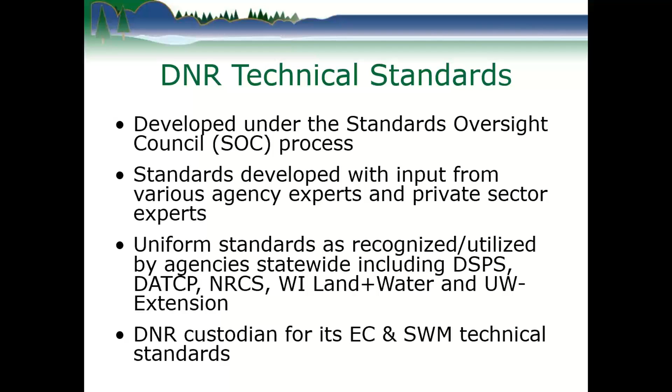As Kate mentioned, as far as the SOC Council, this is a process that many state agencies are using to have a uniform process to develop statewide standards. We pulled together a team, it was close to a year ago when we started on this particular standard. Being how this is a DNR standard, DNR is considered the custodian for it. We are for any of the erosion control or stormwater management technical standards, but there is a number of other agencies that use this: DATCP, NRCS, Wisconsin Land+Water, and UW Extension.

As far as the team that we had, typically there are somewhere in the range of maybe 8 to a dozen people that are on a SOC team. Kate was the coordinator, I was the team lead. Along with that, we basically solicit statewide for applicants that want to be on this type of team. And from here, we try to pick a diverse group of experts that are knowledgeable on the standard that we're looking to develop. So on this, we have a few representatives from manufacturers or those selling these devices, along with private consultants that have used or are looking to use these devices into the future. As well, we even have some representation of those that have worked on models to model these devices.

Proprietary filtration device - you'll see the acronym PFD in this presentation a number of times. So what is a PFD? Generally, it's a granular media filter, it could be a membrane, by which water passes through to remove pollutants.

Now, this standard was developed to basically come up with how to size or determine what efficiency is given for an actual PFD device. And when I say device, I'm not just saying the media that's used. It's actually, we're looking at the results of the chamber, the filter cartridges. These devices also commonly include bypasses, settling chambers, and other mechanisms. So when we're analyzing and looking at the efficiency of this, it's really the device as a whole that is considered in getting this treatment efficiency. Although you need to size it and decide how many cartridges you need to have in there, it's really the device as a whole.

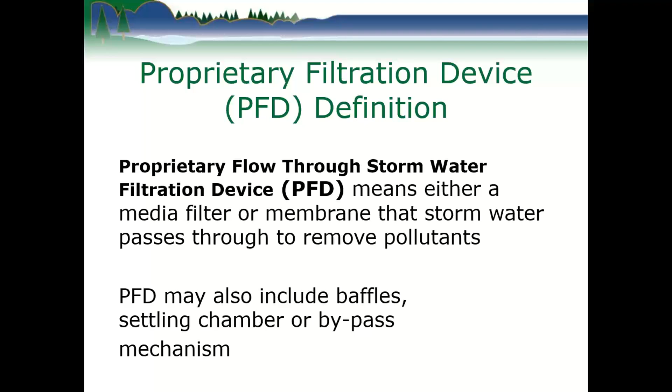What is the purpose of this device? It is used to reduce pollutants discharged to waters of the state, or it might be used for pre-treatment, such as for infiltration below ground.

What this standard is designed for is coming up with the total suspended solids and total phosphorus removal rate that someone can take credit for with this device in Wisconsin.

As far as these devices, they can also remove metals and other pollutants. This standard did not focus on those other pollutants at this time. That is something we may focus on in the future, but largely TSS and total phosphorus, especially with TMDLs, are really the two main pollutants in Wisconsin that we target with these stormwater treatment devices.

Again, this device we're looking at is really the device as a whole, not just the media. There are proprietary medias out there, but this standard is not meant to address that. It's really meant to address the whole system that someone was getting to put in.

As far as the standard, DNR does not give device or product approvals, per se. What we have developed here is a standard by which, if the device meets the standard, you can use it. As far as sizing the device and maintenance of it, that should be consistent with the standard's criteria.

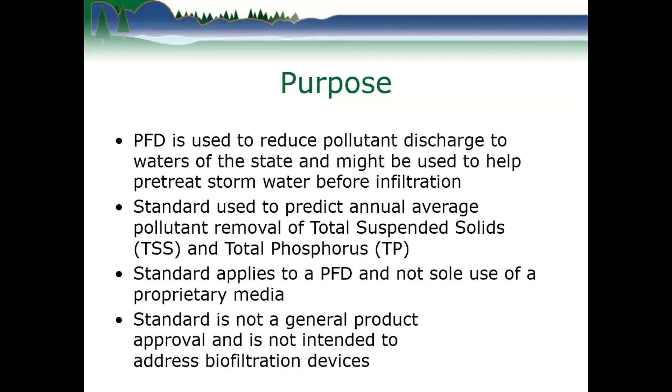Now, conditions where the practices apply. As I said, these are really meant for stormwater runoff. In Wisconsin, we look at the annual average mass reduction of these devices. With storm events, larger storm events may not have as high a treatment occurring.

Smaller storm events, you get a higher level of treatment. As you probably know, new development is usually striving for an 80% overall TSS reduction, where redevelopment commonly is at the 40% level, but it is judged on an annual average mass basis. This standard is meant to address that, not to give you an end-of-pipe effluent concentration like a wastewater permit would include.

Now, as far as using this standard, I mentioned new development is 80%. What we're expecting these filter devices as a credit to get for total suspended solids is something that's going to range from 50 to 80% control.

So trying to get that 80% new development standard, generally these devices are not expected to be used for new development as a sole device anyway. It's more likely they're going to be used for a redevelopment site where your standard is like 40% or something lower. That way, even though the device may be getting more than 40%, it allows for more bypass or uncontrolled areas, so overall you can still meet that 40% standard for a redevelopment site.

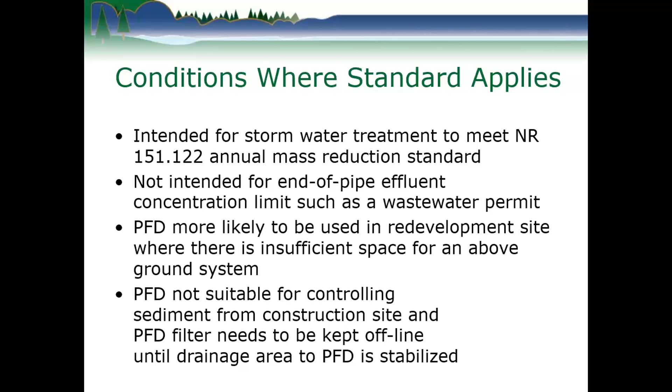Also somewhat similar to infiltration—now, I'm not calling them an infiltration device, but they are a filter. Infiltration devices filter through native soil. One thing to be aware of is when you're putting devices below ground, you're potentially getting down into groundwater areas.

These devices, at least the granular filter media, generally have dry-out periods between rainfall events. Our standard says you have to have at least that granular media part of the device 1 foot above seasonal high groundwater.

You also need to account for whether there's backwater that could potentially come up into the system. It should be protected from events up to a 10-year, 24-hour event if it's being affected by downstream streams or the like that could back up into there.

Putting this underground where you have high groundwater is something that may not work. Maybe there's an alternative that could be worked in there, like putting an under-drain system around below this device to keep groundwater from getting up into it. That might be one way to address the seasonal high groundwater issue.

But again, it's important, just like an infiltration device, that its media needs to have dry-out periods between rainfall events to aerate. Otherwise, that media is likely to become compromised and won't flow through as well if it doesn't get regular dry-out periods.

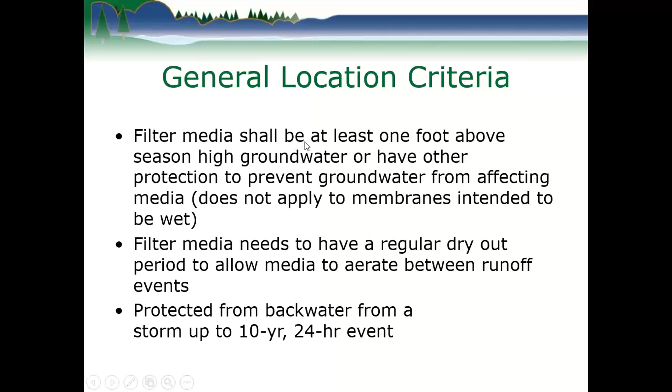One of the biggest things to know for people designing and using these systems is there are two different design criteria you need to meet. One is maintenance life. These filters, just like anything in life, a car filter or the like, if they're doing their job, they're catching pollutants and starting to fill up. Our design maintenance criterion is that those filters should be expected to last 12 months before becoming spent.

When I say spent, that's a 10% drop in flow rate from its maximum treatment flow rate, MTFR. How do you tell a 10% drop in flow rate? That's something I'll get to a little later. We're actually using a New Jersey standard for making that determination.

The other thing that needs to be checked is the filter flow capacity. As I said, there are systems that may have bypasses. You need to look at how much water needs to go through that filter to meet the standards, which dictates how many filter cartridges or what capacity you need. You need to check both of these and use whichever indicates the higher number of filter cartridges necessary.

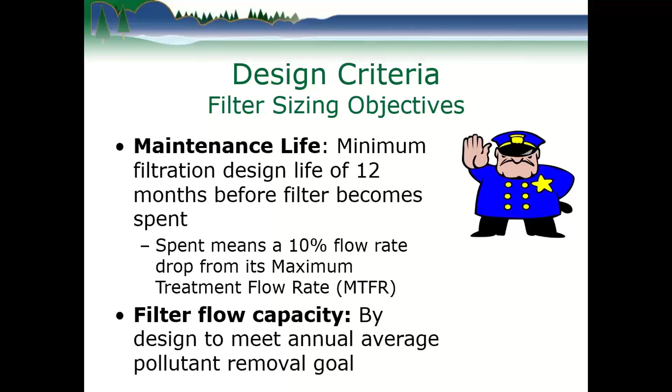Now, design life before maintenance. The standard we're using is a New Jersey Department of Environmental Protection certification of how much drainage area a filter cartridge can handle. It's a matter of at what point the filter cartridge is considered spent. New Jersey's test is such that when the maximum treatment flow rate drops by 10% in testing, it's then considered spent, and at that point it should be changed.

Now, they're testing to get to that point. What they've determined is they're looking at 600 pounds per acre per year coming off a surface like a parking lot for a 12-month period. Some people have said, hey, that's New Jersey, is that the same in Wisconsin? Actually, that is comparable to the load that comes off a Wisconsin parking lot as well, so they were looking at the same type of load from a parking lot that's equivalent here in Wisconsin.

I'll be straight up on one thing: New Jersey's test was done on a synthetic particle size distribution that isn't as fine as, let's say, the NURP particle size distribution, which is what we base our standards on here in Wisconsin. So it's a little coarser, but this is actually the only testing where they've done this to determine when these cartridges clog up. One could argue it's not rigorous enough, but the reality is this is the only test right now that's available.

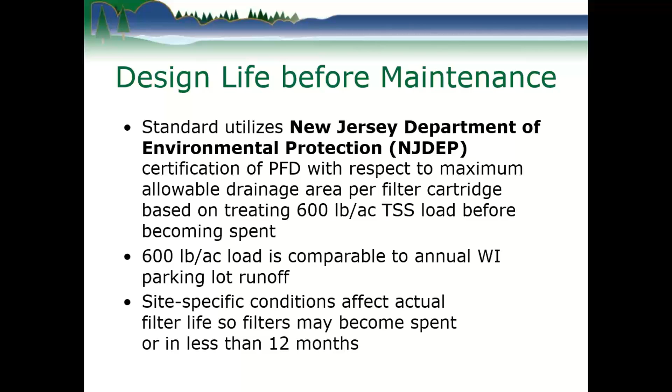Okay, and again, this is by design. Now, in real life, there could be more or less, or an unusual event that happens. So this doesn't guarantee that if there's some type of significant load of some kind coming in there, it could compromise and reduce the life of that filter. I'll touch upon that later with our inspections.

Okay, so actually determining how many filters is needed based on maintenance is actually a very simple calculation. You'll find that our calculation for flow is much more involved. Again, we're looking at the New Jersey kind of certified approval. They actually have gone through each of the cartridges and sizes and come up with how much drainage area each cartridge can handle for 12 months before being considered spent.

So here's an example. Our site is 1.1 acres draining to that proprietary filter device system. Assume that the filter cartridge has been approved by NJDEP for 0.06 acres. So if you're going to filter 1.1 acres with a device able to handle 0.06, the calculation is straightforward: 1.1 divided by 0.06 gives you 18.3. You always round up. So for maintenance, you would need at least 19 filters for this site so that it can meet the 12-month period without becoming spent by design.

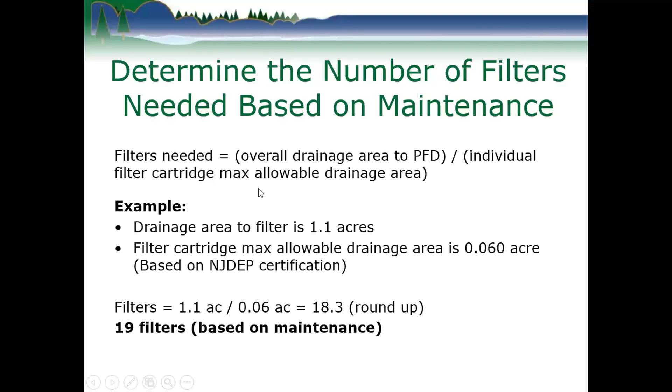Moving forward, the next calculation that has to be done is for filter flow capacity.

These cartridges have a given MTFR, a maximum treatment flow rate. They have limiters to keep from having more flow going through the filter than this. That is what they've been tested and proved for. If you're trying to push more water through than what they were designed to handle, they likely will not have as good a treatment efficiency with more water going through them. So they are limited with flow restrictors or similar, so that they don't exceed this rate.

As far as what affects the maximum treatment flow rate and how many cartridges you need for flow, it's going to be based on the site pollutant removal that's needed. Are you dealing with a redevelopment standard of 40%? Do you need to hit a higher percent than that or not? Also, Wisconsin's annual rainfall, the rate at which it comes down, that distribution affects how many filters you need, and the PFD specific treatment performance.

Now, the PFD specific treatment performance - I haven't said it yet, but we are using Washington State's TAPE approved reports, and devices are what we are allowing to be used. Washington State, when they give an approval for a device, they have given approval that that device meets 80% TSS removal based on real stormwater runoff.

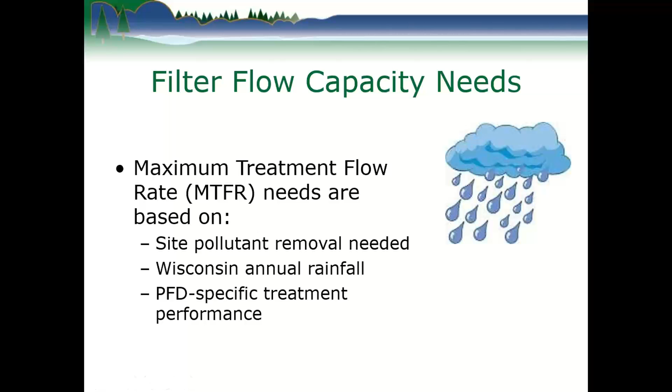You will see that we adjust the efficiency that Washington State's TAPE program has approved, adjusting it downward based on the NURP particle size distribution of the rainfall runoff event that was tested. Now, in determining the maximum flow rate needed, there are actually two different calculation processes for flow rates.

The first, option one, is the calculation process laid out in the standard, which I will be going through. The second option is use of an approved model. Models like WinSLAMM or P8 are generally approved models.

DNR has put together some conditions or restrictions through our guidance memos on how to adapt those models to Wisconsin. At this time, WinSLAMM has two proprietary filter devices in its model. I don't believe P8 has any at this time. We have looked at those two devices in WinSLAMM and how they're done.

We do approve that you can use WinSLAMM to model that. I am not going to go through how to use WinSLAMM here, but that is an alternative. Now, what we heard very loud and clear is that there are other filter devices on the market.

We are largely looking at those that have been approved through the Washington State TAPE program. I don't know the exact number, but I'd say there are at least a half dozen that have gotten that TAPE GULD approval for sediment. They call it a basic approval.

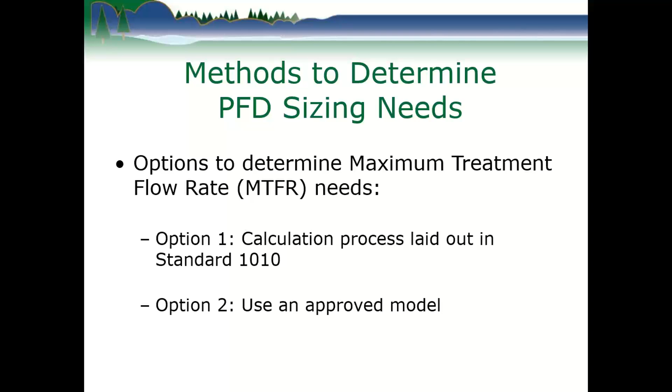Now, the standard 1010 does have some examples in there, and I think it does a pretty good job of laying out how to go through them. So if this presentation isn't clear and you have questions, I suggest going to that standard and looking through those examples before giving me a call.

Granted, if you work through things and still have questions or want to check with me, you're welcome to shoot me an email or give me a phone call and I'll try to help you with that. But I do think the standard goes through pretty well with the examples in there.

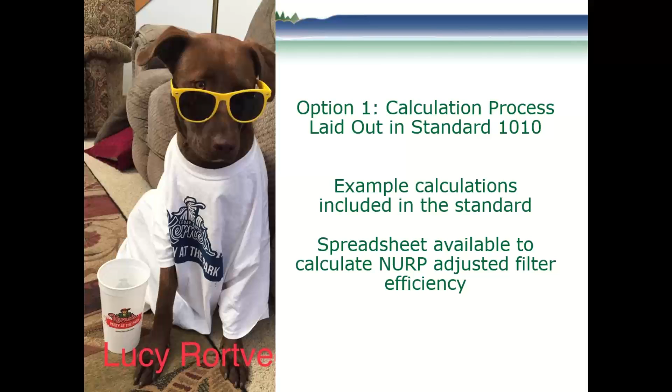The other thing, we've developed a spreadsheet calculation to help with the NURP adjusted filter efficiency. That is what I believe to be the most complex or potentially confusing step, but our spreadsheet, I think, makes that pretty clear to work through.

Okay, now coming up with site treatment: how much do we need to treat? It's actually a very simple looking equation. You're essentially looking at how much runoff is filtered times the efficiency of the filter, which gives you the amount of control, such as for TSS, for the site.

So if you're looking at a redevelopment site, generally the DNR statewide standard is 40% TSS control. I know there are individual municipalities that require more than that, especially to help meet their TMDL reductions expected of them throughout their municipality. But you need to know what standard you're striving for.

Really, the next step in the process is determining the overall NURP adjusted filter efficiency for the filters I'm looking at using. Based on that, you're able to calculate what percentage of the annual average runoff you need to filter to meet that standard. And the amount of annual average runoff is used to figure out how much filter capacity, how many filters, and how much maximum treatment flow rate you need to treat that water.

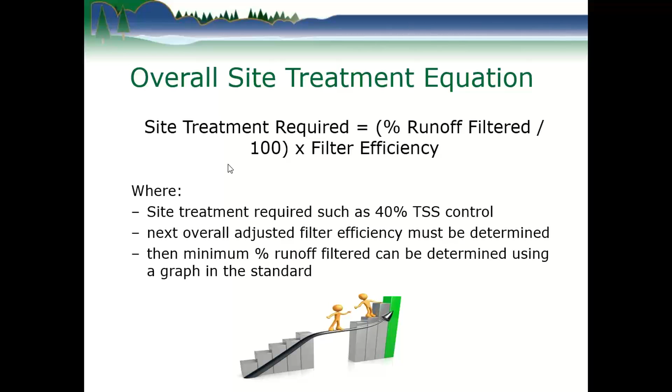Okay, as I mentioned, we are using the data from the test report from the Washington State TAPE certification. They've done testing of real stormwater. They generally have about, I believe, somewhere between 12 to 15 real stormwater runoff events that were analyzed.

They look at the particle size distribution from at least 3 influent samples, and then they analyze all of the effluent samples for those 12 to 15 events to determine the particle size breakdown. What we're doing is looking at how that particle size distribution compares to the NURP particle size distribution. If it's not as fine, they're going to have a reduction in the rate measured as part of that certified test.

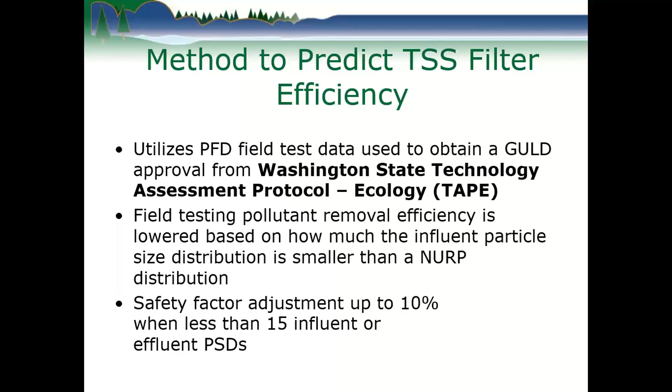The other thing we're pushing for is having at least 15 influent and effluent particle size distributions taken. A lot of the testing that has occurred only had 3 influent particle size distributions, so we're adding a safety factor, adjusting that rate down by up to 10% if there's less than 15 influent and effluent PSDs.

Okay, I know this is pretty small. Hopefully everybody is at least looking at a stationary computer or laptop with a big enough screen. When I say we're adjusting the NURP particle size distribution, if you look at the left column, particle size in microns, generally this TAPE testing has the particle size distribution broken into at least 3 groupings, and these are the most common: less than 4 microns, between 4 to 62.5, and greater than 62.5 microns.

Now the next column over, NURP PSD, percent by mass, is the percent by mass of particles in the NURP particle size distribution for that grouping. So 29% of the mass of basically TSS is smaller than 4 microns, 58% is in that middle category, and over 13% of the mass are particles over 62.5.

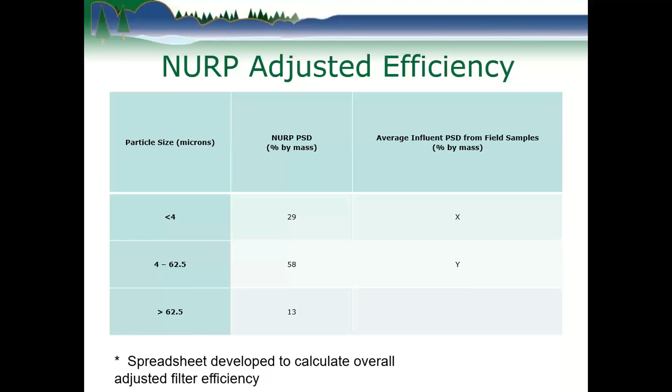Now in the far right column, X and Y, we will need to look at the report and determine what the average percent mass in those two categories is that was used in the Washington State TAPE testing. So we need a value for X and a value for Y. We've developed a spreadsheet calculation to help with this process, and this is where I'm going to switch over and hopefully show you a little better.

Eric, we do have one more question related to the TAPE listing.

The question reads: does Washington State TAPE or New Jersey DEP have a list of approved proprietary PFDs that we can select from? I did just paste the Washington list that we had researched and analyzed as part of the teamwork into the chat box, but do you have anything more to add as far as that starting list?

Yeah, my recommendation would be, as far as NJDEP with the maintenance, we're using that just for maintenance, but what we're using is devices that were approved for TAPE. So I would suggest looking at the Washington State TAPE approved devices.

They have a website where, as I said, they've got different kinds of approvals. The main approval that everyone is trying to shoot for is this GULD approval.

You'll also find that they have a PULD and a CULD, which means their initial stages of, hey, we did synthetic testing, it looks good, we're going to do real stormwater testing, and the next level is checking again. But the GULD is really the gold standard, where they have done their full analysis.

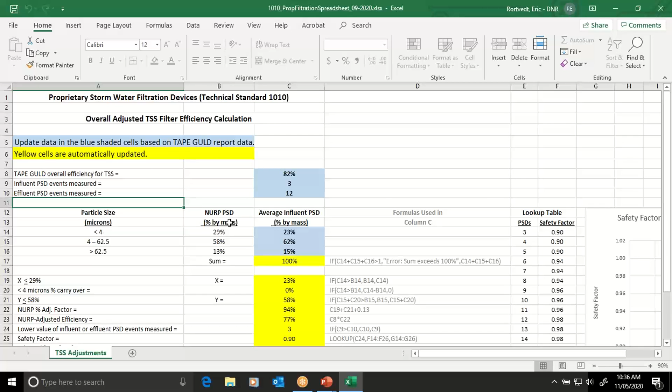Okay, I'm going to move on now. What I have up is a spreadsheet I put together to help with adjustment of the pollutant efficiency. The shaded areas - blue is where a person needs to input information, only 6 fields to fill in. The yellow is what's calculated automatically. Scrolling to the bottom, what you're ultimately looking for is the overall adjusted TSS filter efficiency, shown here as 69%.

So what you'll find when you go through using the TAPE approved reports and information, this overall efficiency is going to be at a minimum 80%. It could be higher than that. So you put the overall efficiency determined in the report in here.

This is the exact same spreadsheet that's on DNR's website. If you look under our DNR stormwater post-construction standards page, where we have technical standards like wet detention ponds, infiltration basins, bioretention, we also have this standard for proprietary filter standards 1010. You'll find 3 files there: the standard, the spreadsheet, and a technical note a few pages long discussing primarily what to expect and be aware of with maintenance of these systems.

These next 2 values are the number of PSDs measured for the influent, so you can change those. If you were to have 15 for both of these or more, the safety factor would be 1 - there would be no adjustment. But if either value is less than 15, there is somewhat of an adjustment, at a maximum of 10%.

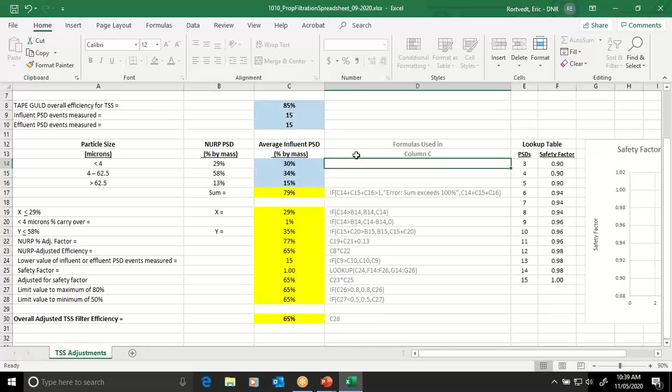I've gone step by step through here. If you wanted to take time to verify what's done, I've also shown where the formulas are, exactly how we step through this process. This spreadsheet is locked such that the only things you can change are the blue shaded cells where you need to input information. This is pretty good at walking you through and making sure you don't get off track.

As I said, I was the team lead with the standard, and I put together this spreadsheet. So if you have issues with it or find something that doesn't seem right, feel free to send me an email or give me a phone call, and I can try to help you there.

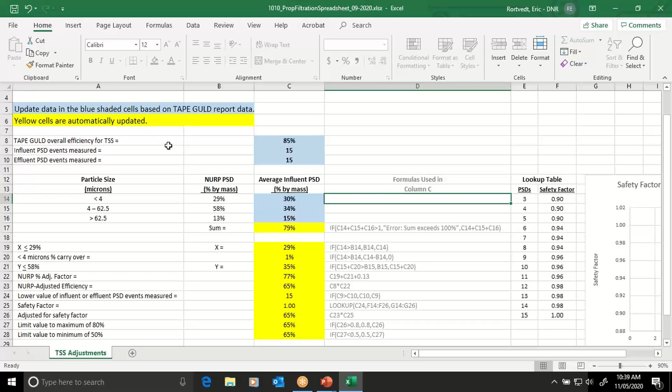Okay, well, I'm going to move off the spreadsheet now and go back to my presentation.

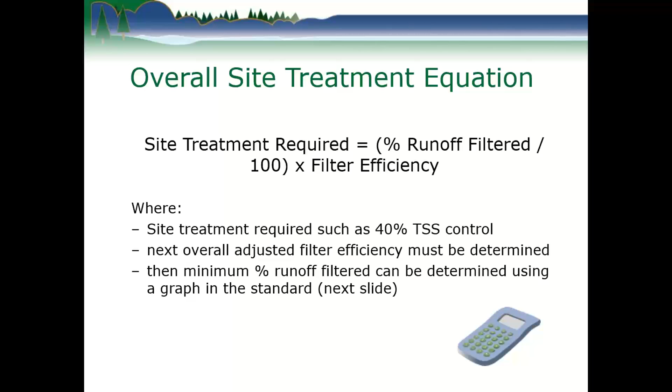Okay, now this is the same slide we went over before talking about the equation. I just want to touch back and say the main thing as far as what standard to meet, if it's redevelopment 40%, the next step is determining what the overall adjusted filter efficiency is. That's really what's generated out of the spreadsheet, the final value at the bottom of the state page, that's the overall adjusted filter efficiency. With those two variables, knowing what standard to meet and what the filter efficiency is, and the amount of water coming to the filter, we can determine how much annual average runoff is needed.

So for example, if we determine through our calculations that we need to meet that 40% TSS control standard, and we know that our proprietary filter is going to get 60% treatment, well, we need to get 40, our filter gets 60%. Based on that, we can actually allow for about 33% of the annual average runoff either bypassing or being untreated, not going through the filter.

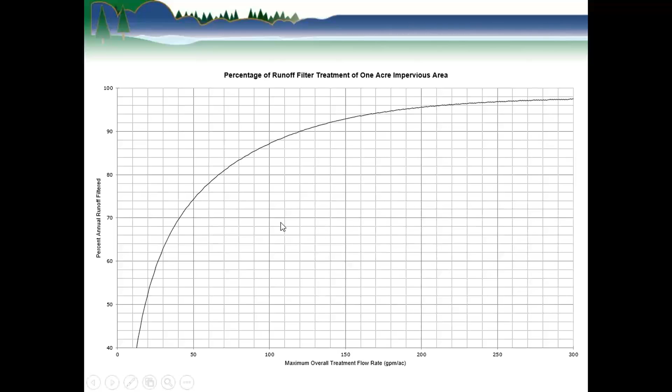So it's 40% times 100, you're dividing that by the efficiency of the filter times the percentage of the site that's treated. So you're looking at treating 1.1 acres out of 1.4 of the parking lot. When you go through that, the value is 85%. You need to treat 85% of the annual average runoff for this example. So 85%, jumping back here, 85% on here, moving across till we hit this line, move down to the x-axis, you're going to find that you need about 87 gallons per minute per acre of capacity. So now I'm going to go to the next slide.

Like I said, just from the last slide, we determined 85% of the annual runoff is needed. We looked at the graph and determined that it requires 87 gallons per minute of treatment flow rate per acre. But we actually have 1.1 acres of area draining to our filters, and that 87 gallons per minute is for 1 acre. So we need to upscale it a bit, doing 87 times 1.1 acres, which gives us 96 gallons per minute of treatment flow rate needed. And we always round up.

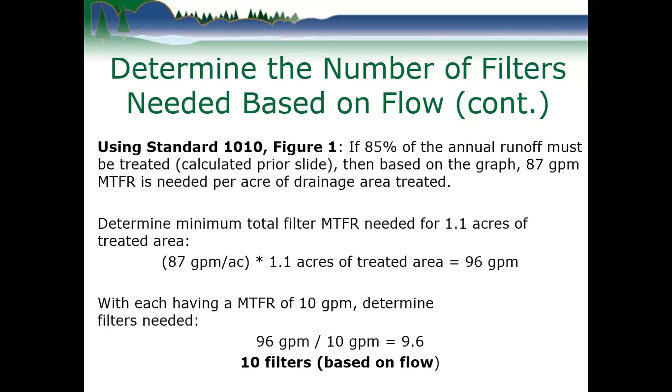So with our cartridges designed to handle a maximum of 10 gallons per minute, 96 divided by 10 is 9.6. We round up, so we need 10 filters based on flow, in order to give us enough flow capacity so that 85% or more of the annual average runoff is filtered.

So in the example I ran through, for maintenance, we found that 19 filters were needed for the filter capacity to last 12 months by design without becoming spent. But based on flow, we only needed 10 filters, based on capacity. 10 filters is enough to handle the flow, but if you only install 10, it's expected that filter will clog up and won't make it 12 months. That's why you need to use the higher of the two, maintenance or flow.

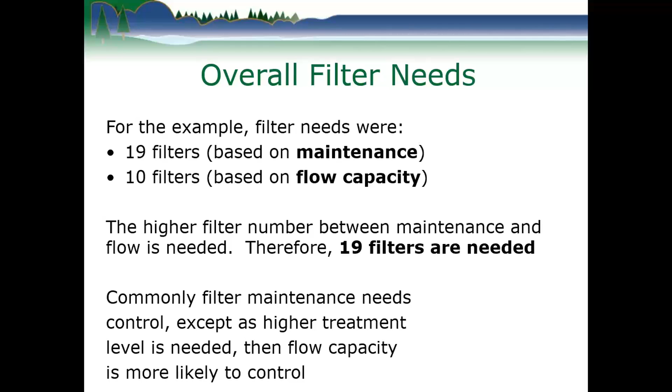As I mentioned earlier, when you're looking at treatment flow rates on the lower scale, like 40, 50, 60%, you'll usually find that the maintenance requirement controls and requires more filters than flow. When you need a higher treatment level, say 90% or more of the flow capacity, that's when the number of filters needed for flow capacity may exceed what's needed for maintenance.

Now I've gone through my completed talk on how to adjust for filter efficiency and how to do the calculation to bring it back into a site. What I just went through is all done by hand calculations or using the spreadsheet to help you. You do not need a model such as SLAMM or P8 to determine how to size these devices. This standard allows for devices that have gone through and gotten that TAPE GULD approval, so long as they're able to operate for 12 months by design without maintenance. You can take those devices that aren't in a model like WinSLAMM or P8 and go through this process to size them for your site.

The next thing I want to touch on is total phosphorus filtration efficiency. Now, TAPE, we're using the same thing. It needs to be approved through Washington State's TAPE approval process. In Washington State, anything that gets phosphorus approval is shown to have at a minimum 50% total phosphorus removal.

Although we've done this adjustment for sediment or TSS based on NURP particle size distribution, we are not adjusting the values determined through the Washington State certification process. So if something has been approved for phosphorus showing 50% or more phosphorus removal, in Wisconsin we're allowing that credit of 50% or more to be used without adjustment.

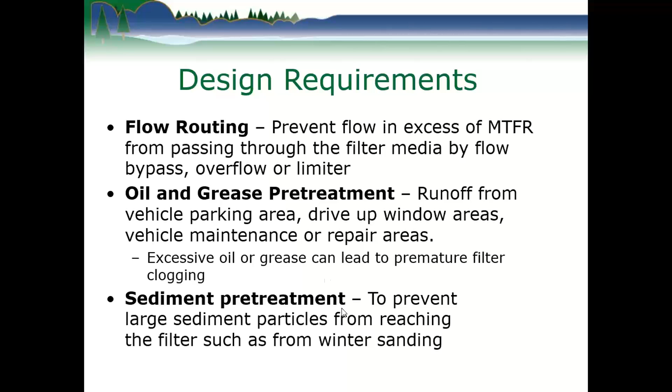Okay, Eric, we do have a question on the phosphorus, so maybe cycle back to that for a moment. The question is, if TSS removal rates are reduced based on NURP particle distribution for Wisconsin, wouldn't phosphorus removal rates also be reduced?

You are correct that it is reduced, but for this 25% total phosphorus removal credit, we are confident that all of these devices that have gone through the TAPE GULD approval, even when adjusted for NURP, are going to get at least a 50% TSS removal rate. Based on a TSS removal rate of 50%, we feel comfortable that giving 25% total phosphorus removal credit is reasonable. So yes, you're right, the lower removal doesn't capture quite as much phosphorus, but at the low end of our range of 50%, we still feel comfortable that 25% total phosphorus removal is reasonable.

That's something that, comparatively, looking at sand filters or other devices getting closer to maybe 80% removal, the same thing can be said for them: catching particulate bound will get you total phosphorus, and something like a sand filter would be capturing even more than that amount of total phosphorus.

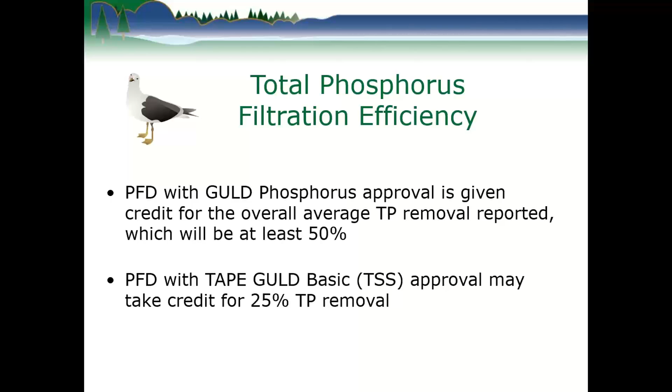Okay, I think this is the slide where I'm at now.

Design requirements: the first one seems very basic and should be obvious — access for maintenance. That is something we want to make sure of, and hopefully by the end of this you should understand the stress on it. It is very important to be able to access and maintain all aspects of this system.

It's true, all stormwater facilities will need maintenance of some kind. Some facilities, like a wet detention pond, the maintenance you do most years might just be mowing and dealing with vegetation on the sides, or making sure the outlet structures aren't becoming clogged. You don't necessarily have to clean out the soil every year. It might not be something you have to clean up except once every 10 or 20 years or more.

That is not the case with these proprietary filter devices. It's very important to do proper inspections, and it's generally expected that you should be cleaning and replacing these cartridges every 12 months. That is generally the sizing that they're designed for, a 12-month period. So anything on that structure you need to access for maintenance, you need that.

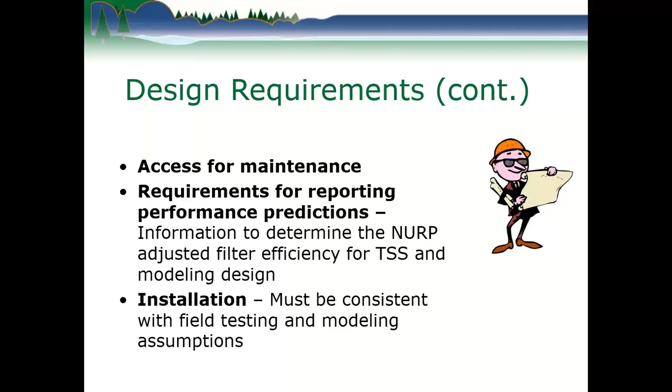Moving on, installation. These devices are tested in Washington State under certain conditions. Your installation must be consistent with the testing that was done to determine how these devices operate and what their efficiency is.

Okay, operation and maintenance. As I said, we're looking to install these such that they're designed to operate for 12 months without requiring maintenance. Well, that's by design. The world doesn't always work exactly how we intended. There could be an event of some kind, or more loading coming off an area than is typical, so the operation of a filter might not actually last a full 12 months.

So what we have in our standard is, for the first year of normal operation, there should be quarterly inspections checking the filter device and its cartridges, making sure it's operating as it's supposed to, and that none of the manufacturer's indicators show the cartridges becoming spent or compromised. After that first year, if it's clearly shown that no maintenance is needed and the filter was operating as expected with no indicators of failure within that 12-month period, we allow the inspections to drop back to an annual, once-every-12-month inspection, and generally that should occur after the spring thaw.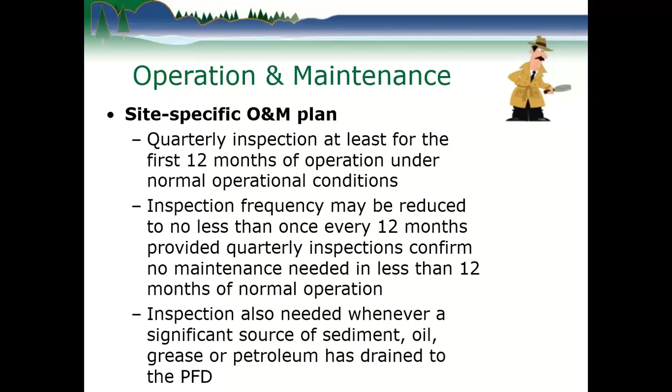Now, I know I kind of touched on this again, and I'm going right back over it to stress it because it is important. These devices, unlike your wet detention pond where it's obvious when the outlet becomes clogged and it's not draining out because the pond's full, and you need to do something, these devices are below ground - they're out of mind unless you intentionally go look for them.

If those filter cartridges become spent, the water is going to bypass around them, and at the surface you won't know it unless you go in there, inspect, open them up, and look right in there to see what's happening. Plus, when you're doing inspections, most of the time people are doing those inspections it's not currently raining out. If you're looking at it in a dry weather condition, and the system was clogged, water's going to be bypassing.

Now there are certain indicators that each type of device has - the original equipment manufacturer has a manual that specifies what to look for as signs of it becoming spent. Here's how it will look, here's what's there, and here's when you need to maintain it. So if those indicators indicate you need to change the cartridges, you need to do so.

However, as I stressed, by design these devices are designed to get you through 12 months before getting spent, but they're generally not designed to go for another year. It's really at 12 months when these cartridges should be changed out.